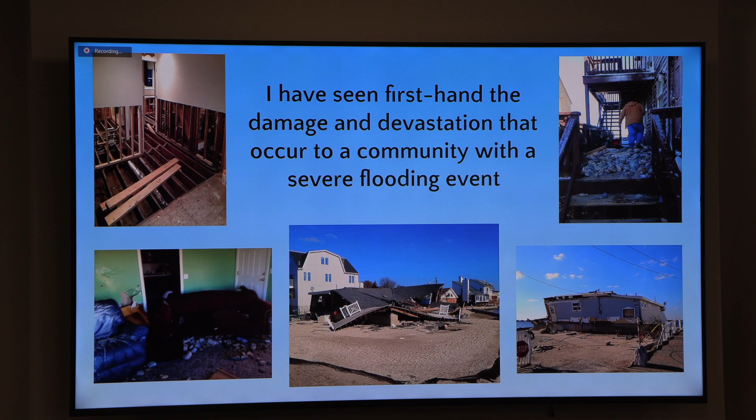So these are just some pictures from New Jersey and also from Brant Rock - that building there, the old one with all the rocks on it. That used to be right down in Brant Rock where some of the new structures are now. So that's why I'm passionate about what I do - because I love this area, I love the environment, and I want to protect our residents from seeing that kind of devastation. That devastation can happen in any storm. Just looking at this picture right here, we can see the South River and where it used to come out on Rexhame Beach.

In one night, in one storm, it completely changed the landscape, changed everything. If that kind of event were to happen now, we can imagine the devastation and damage that would be done around here. So what we have to do is plan for that and take every opportunity to improve the structures and the land in a responsible way, so we can protect these resources and protect homeowners from having to replace everything in a disastrous event. So in an effort to help that ultimate goal, and also help our standing with

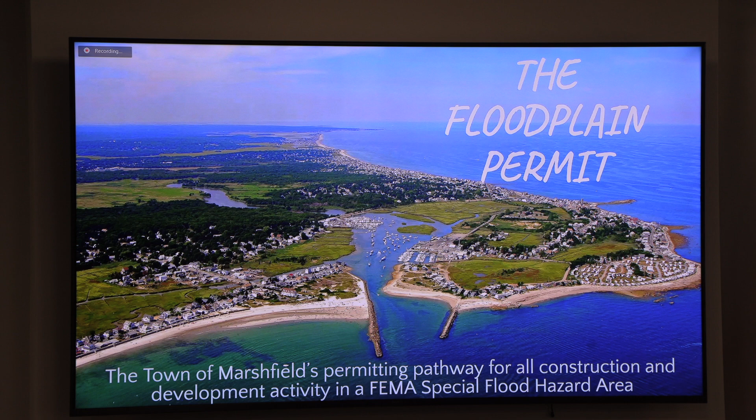FEMA and the National Flood Insurance Program and the community rating system, the floodplain permit was developed to be the town of Marshfield's permitting pathway for all construction and development activity in a FEMA special flood hazard area, which is the same exact thing as land subject to coastal storm flowage. They're one and the same.

So why does the town of Marshfield require a floodplain permit? Well, we are an NFIP community, meaning we're members of the National Flood Insurance Program. In October of 1977, just before the blizzard of '78, FEMA issued maps for Marshfield. We accepted them as our official flood maps and became a member of the National Flood Insurance Program.

In 2016, we became a member of the community rating system, an extra program within the National Flood Insurance Program that communities can engage in to receive different benefits. Basically, once you're involved in this program, your residents that have to pay for flood insurance receive discounts based on where you're at. We also get better access to disaster relief funds and recovery funds, and a lot of access to officials and guidance being in this CRS program.

The other thing is the floodplain bylaw. The Marshfield floodplain bylaw was adopted at town meeting. We've always had a floodplain bylaw for years—I think Mr. Finn may have been part of writing that back in the 70s. So the floodplain bylaw has been there for quite a long time, since we became a member of the National Flood Insurance Program, and there's always been a requirement for a floodplain permit.

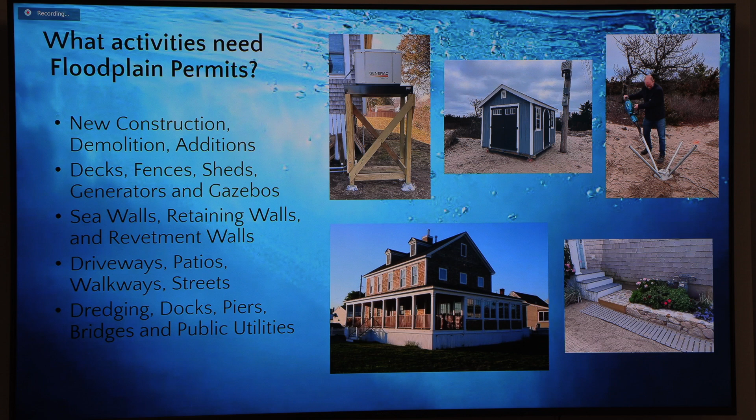So what does the floodplain permit actually do as we have designed it? Well, it provides a checklist of all required permits, and that's a very specific thing that gets us points with CRS. If we give people a checklist of all the different permits that you're going to need based on that activity, that's something that gives us points.

It tracks those permits' progress and inspections throughout all the different departments. It maintains a cohesive site to have records of site plans, elevation certificates, permits, approvals, documents, and it helps maintain and improve our status with the Community Rating System.

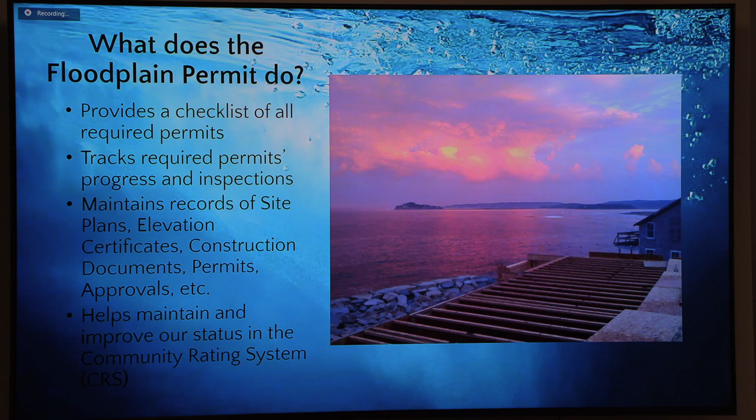So how do you apply? Well, we try to make it as easy as possible, and that's just going to the Marshfield, Massachusetts building page. We go to the building department page. From there, we've got a link right on the top that says apply for permits. You create an account and you select the building department.

Hopefully at some point we're going to have a lot of departments doing their permitting online through this system, and the concurrent permitting and cross-checking things will happen a lot more smoothly than it currently does. But you'll choose the building department and the floodplain permit, and then we'll get going.

The intended result of this collaborative effort is great success for all of us. So that's what I'm hoping for here.

So Mike, if you would switch over the screen. What we're going to do right now is just show you what you would do if you're a resident going through the floodplain permit. So if you go up to the top there, Mike, to departments, or to government, and go down to the building department, and apply for permits is right on the top left there.

And you can click down, and he's just going to sign into an account because we already have an account going for this right now. You can just hit login on the—I'm probably going to have to switch over. Hold on, I'll do it real quick. Sorry. Did you close it? No. Yeah, I think I closed it.

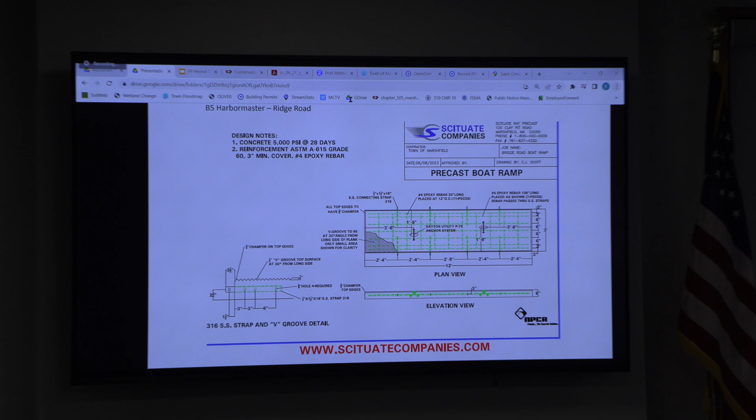I met with our consultant Pat Brennan and DPW Chief Champion a few months back, probably late, just after the winter, about the boat ramp. I tried to get some funding this year through town meeting to fix this ramp up. However, it is becoming a safety issue with the lower part of the ramp, with the erosion and the asphalt buckling. I'm not sure if Mike had any pictures there.

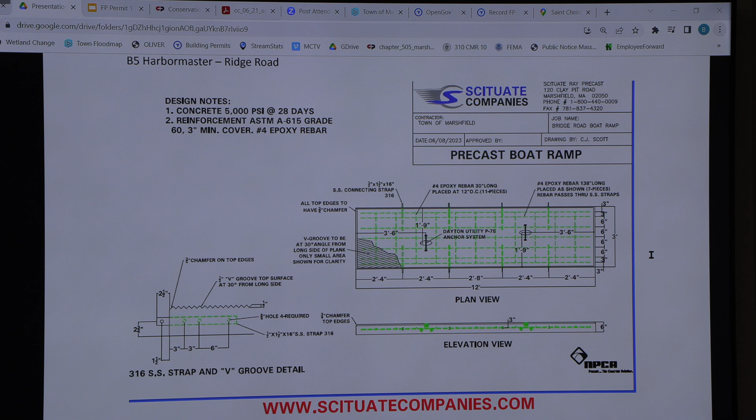My plan is to fix the lower part of the ramp, basically saw cut it, and do a temporary patch with these precast boat ramp forms that you see in front of you. These are 3 feet by 12 feet, commonly used boat ramps now. They're a little safer, probably, I think, environmentally friendly as well. The town of Hull is also doing a ramp similar to this, and the town of Hingham just completed one on 3A, similar style. They all kind of lock together.

Nuts and bolts, so I'm looking to correct that. Furthermore, I think I discussed this with Dave Hill from DEP about this. We agreed that the ramp could be repaired under various conditions. This ramp dates back to probably the 50s or 70s, where it was at one point 15 feet wide. Currently it's 25 feet wide, and that's been that way since I've been Harbor Master since '07.

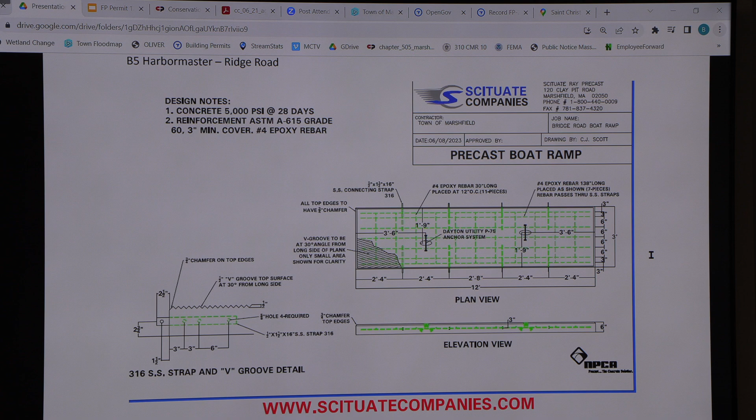Okay, so this is essentially under an emergency situation, correct? Yes, and I still have to find the funding as well. Obviously, I think I have some sources to fund it. The concrete pads are locally sourced from Clay Pit Road, they can make those in about 6 weeks, they said. And I did file my floodplain permit today, so that's done. That's good.

Need your blessing for this, and hopefully we can get this corrected before we get too far into the boating season.

Any commissioner questions or comments? Mike, I did go out on site a few months ago, and it was in a state of disrepair. Oh, I would concur with that, I'm very familiar with it. I can't help but think that these precast ramps would be a lot more environmentally sound than putting asphalt paving in there. I'm very familiar with it too.

Furthermore, Craig, the concrete pads are, like Bert said, more environmentally friendly. They also provide more safety features. As you know, with asphalt, we try to pressure wash the ramps every year just to clean them off with the algae and silt, and the next tide, they just get covered again.

We have cars sliding, trucks sliding into the ramp and sliding through the water, which is dangerous. We've had folks break their hips getting out of the car, sliding, tripping, and slipping on the ramp. So these have like a quarter-inch groove on them, so it's going to give people some traction, definitely trailer and truck tire traction as well. Overall it's just an improvement, and we'll look to include these into the new design.

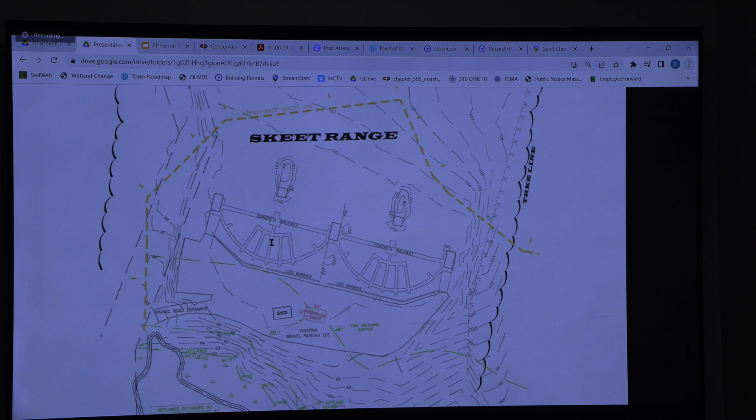So I'm Rick Savant with Sundeck and Taylor. Yes, the gun club is proposing a new shed out back by the existing skeet range. They have an existing shed and are looking to place another one adjacent to it. This is an existing gravel area, an existing parking lot. There's a BVW associated with the pond, the trout pond that's there. I forget the name of the pond, but that's what they're hoping to do. They need storage.

It's delineated by Brad Holmes, he did the delineation, and yes, they're proposing that shed in the existing parking lot. It's placed so they can get access from trucks, because they need it in that specific spot. I talked to them about moving it out of the 100-foot buffer, but they have specific reasons it needs to be right where it is. So they are just inside the 100 foot, and I believe it's going on blocks. That's about the extent of what I know about this.

Okay, your comments, Mike, you satisfied with the wetland delineation? Yes, I am, it's pretty cut and dry there. There's this pond out towards the rear of the parking lot. This would go directly adjacent to an existing shed on the property in a pre-disturbed gravel parking lot type environment. I would agree, I was out there today, it's just as you described it.

Comments from the building commissioner, he's gonna want a different sort of foundation, but we'll just make it subject to building regulations and building permits. Any comments from commissioners? No. Any comments from the public on this? I see nothing. I don't think we need anything other than normal conditions, do we, Mike? Just standard special conditions.